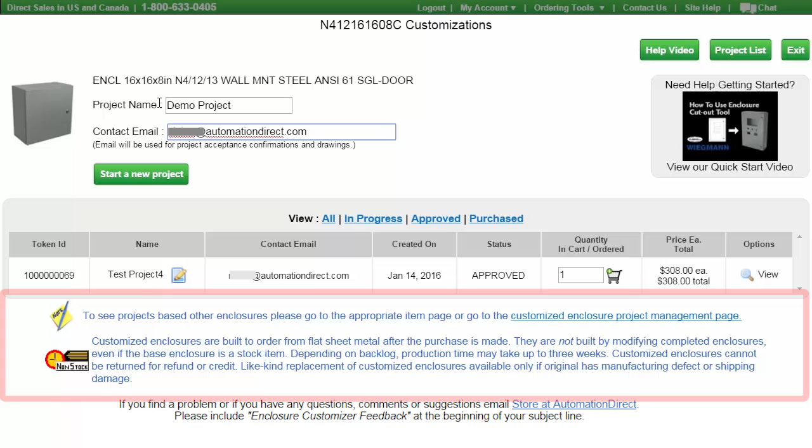Down here there are some important notes. If you click on this one, it takes you to this page where you can see a list of all the enclosures that currently support customization.

This note reminds us that it's important to understand that custom enclosures are made directly from sheet metal. They don't modify already completed enclosures, even if they're in stock. Your cutouts are added as part of the manufacturing flow as the enclosure is made. They aren't added afterwards, which means your holes get the same finish and paint and everything else as the rest of the enclosure, for a truly professional looking enclosure.

That's the good news. The bad news is your custom enclosure will be part of whatever the current manufacturing flow is. So if there's currently a backlog in manufacturing, your enclosure will come out of that queue just like any other enclosure. Just beware that your lead time depends on the current manufacturing load at the factory.

Hit the Start a New Project button, and just like that, we're now in the Enclosure Customization tool. You can save and save as. This green check mark is the one you hit when you're ready to submit your drawing for approval, so don't click that yet. This selects which side of the enclosure you want to view.

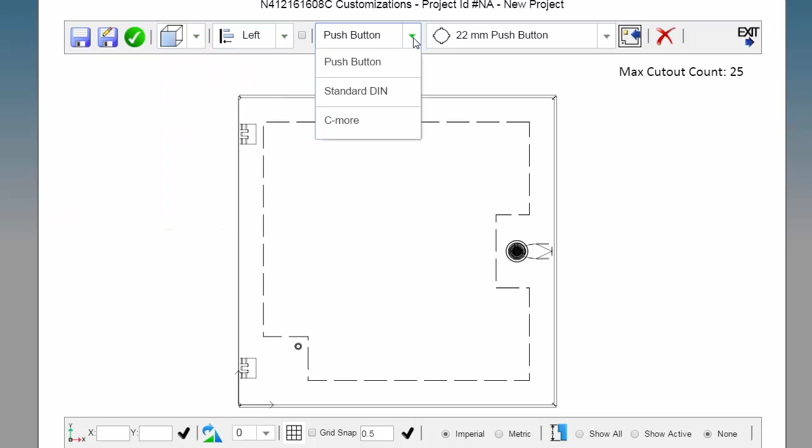This allows you to align cutouts. We don't have any cutouts yet, so we'll come back to that one. This selects the type of cutout: a push button, a rectangular DIN, or an operator interface. And this selects the size of that type of cutout.

For example, let's select a push button and a 22mm hole size. To place that on the enclosure, click the Placement button and click where you want that hole placed. You can then drag that hole wherever you want. The coordinates down here in the lower left corner update as you drag.

Can you type in the coordinates directly? Sure. Let's put this at 5 inches and 5 inches and hit OK. The origin is always in the lower left corner. So this button is 5 inches over and 5 inches up.

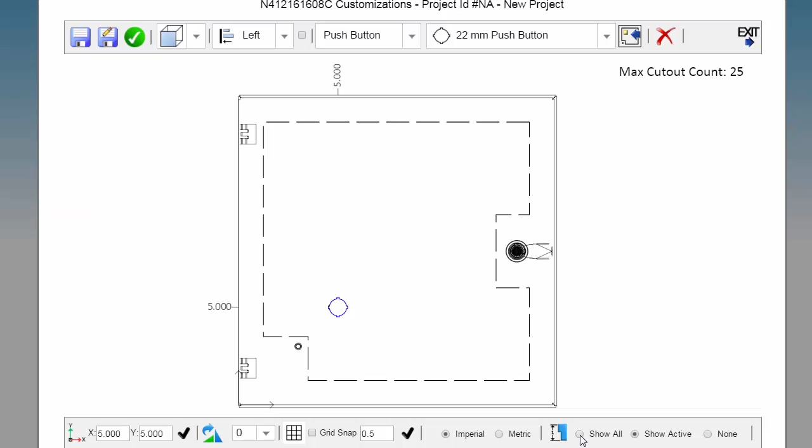You can also see that by turning on the coordinates for this part. Select the part and hit Show Active to see the coordinates for the currently selected part, or hit Show All to see all of the coordinates for all the holes on this face.

This guy lets you flip the part, which makes no sense on a round hole, so let's get something else. How about a 1/8 DIN cutout?

Click the Placement button and then click on the enclosure. I want that centered at 8 by 10 inches and hit the OK check mark to do it. The coordinates of all holes are always at the center of the hole.

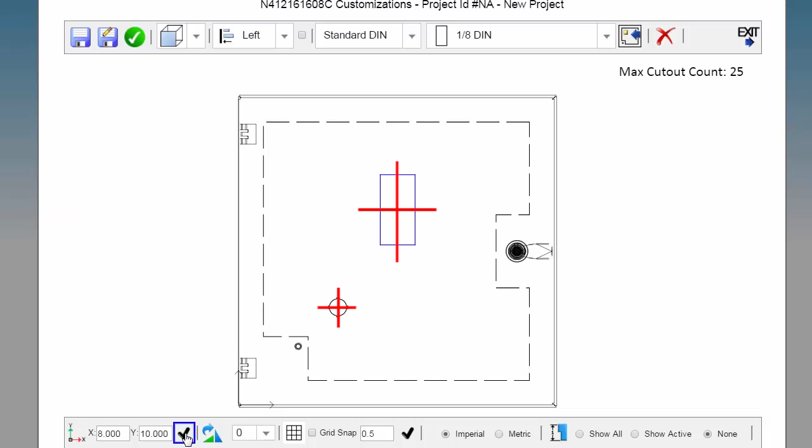We really wanted this to be horizontal, so let's flip it. Just select it, the outline turns blue, and then click on this button. We can also select the angle here. Now I don't actually need that hole, so I'll just select it and hit this red X to delete it.

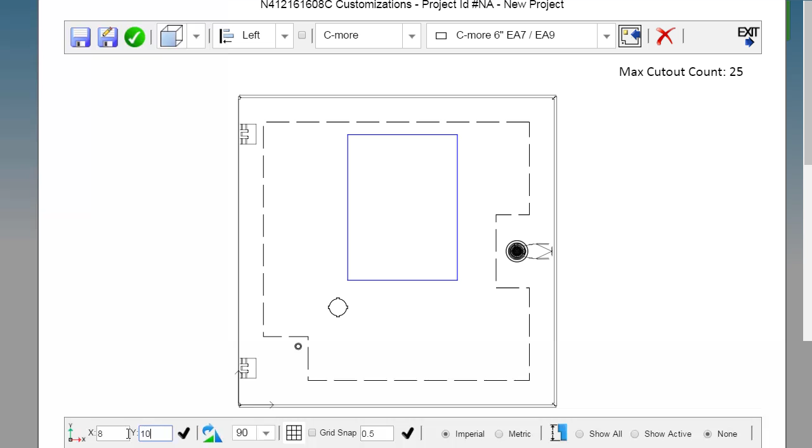Let's add a cutout for a C-more HMI that's a 6-inch panel. Click the Placement button, drop it on the screen, and drag it wherever you want, or enter the coordinates manually. I want it 8 inches over and 10 inches up. And let's flip that to horizontal.

Let's add a couple more buttons. And let's align this one to the left side of the C-more cutout, this one to the right side, and this one to the center.

To align an object, select the alignment type you want. This little checkbox tells us alignment is enabled. Select the base cutout that you want to align everything else to. It turns green to remind you it's the base object.

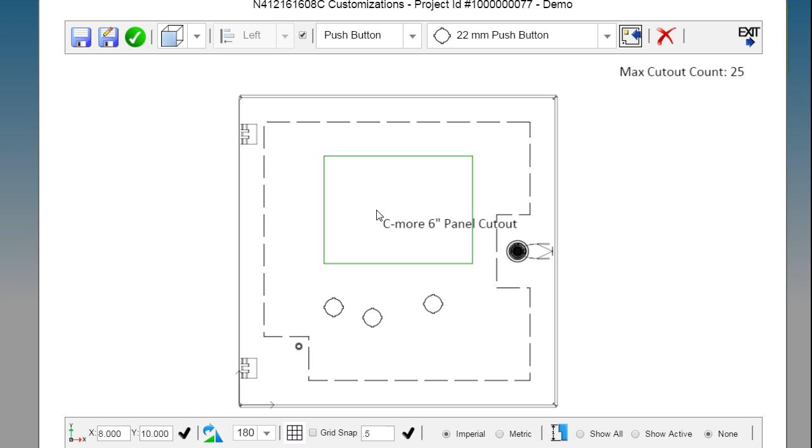Now select the object that you want to align to this green object. Click away to turn off alignment. The checkbox clears, and select Right Alignment. Right Alignment is now enabled. Select the base object.

It turns green. Select the object we want to align to that. Click Away to disable alignment.

Choose Center. Select the C-more cutout as the base object. By the way, if you change your mind and want a different base object, just click Away to disable alignment, re-enable alignment, and select a new base object. Now we didn't want to do that, so I'll click Away, re-enable, and select the C-more cutout as the base object, and then select this cutout to center align it to the C-more cutout.

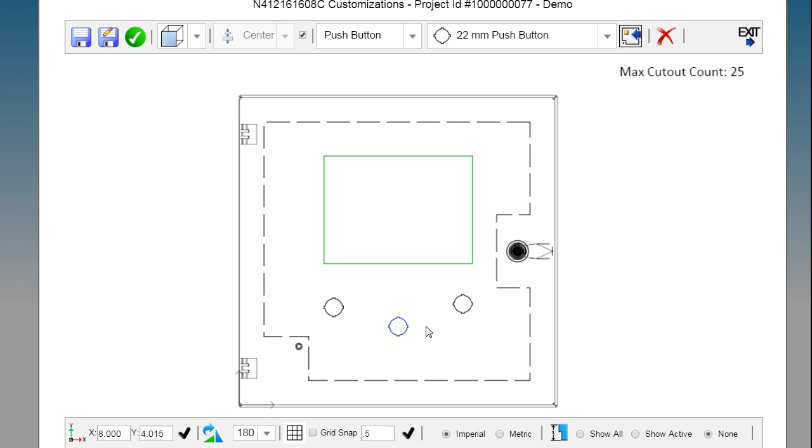You can still drag objects while in this mode. Click on them again to align them as long as the alignment mode is enabled. Now let's align these two buttons with this one. Click Away to finish the center alignment.

Change to middle alignment. Select the first button as the base object, and then select the other two to align them to it. Another way to align objects is to use the grid.

Let's click Away to finish the alignment tool and turn on the grid. Enter the grid size you want here and click the OK check mark. The grid always starts at the origin. Any cutouts you add now will always align with the nearest grid intersection.

Can we use the alignment tool while in grid mode? Sure, and note that the alignment still uses the green object as the alignment guide, not the grid.

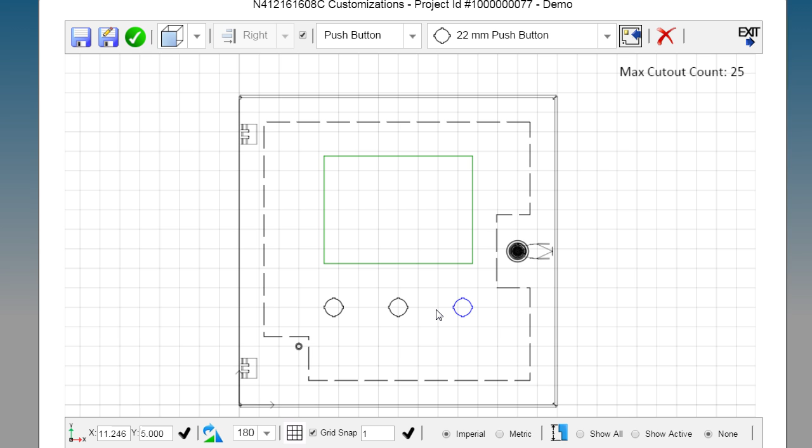Again, this button shows you the cutout coordinates for all the holes on this face relative to the lower left origin, and this shows everything in metric. And of course, you can do everything we've shown here to any side of the enclosure up to the maximum of 25 cutouts. Suppose you aren't done, but you need to go do something else for a while.

Well, just hit Save. It saves the design. So if we exit, we already saved the changes, we can come back anytime by clicking on this Edit button, and we're right back where we were.

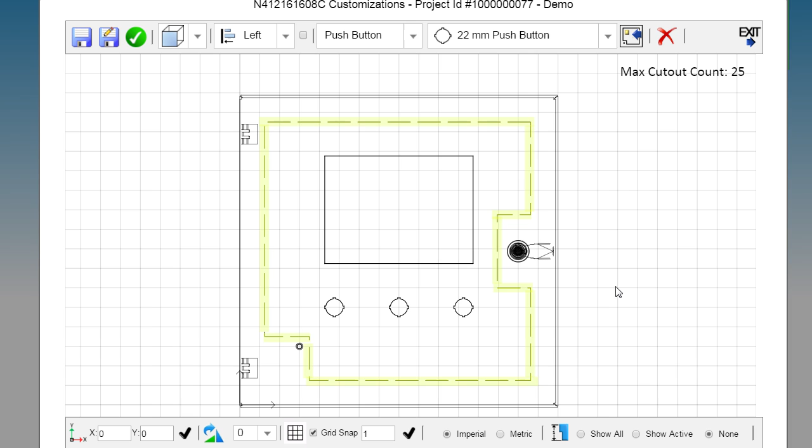This dashed line is the maximum allowable cutout area. You won't be allowed to go past that dashed line. This tool also has minimum clearance for cutouts. If you try to put a cutout too close to another, you'll see a red interference line pop up.

Now please understand that these red interference lines are just allowing for cabinet integrity. They leave enough metal so no portion of the cabinet will be too weak. They don't show interferences for the parts you plan to use.

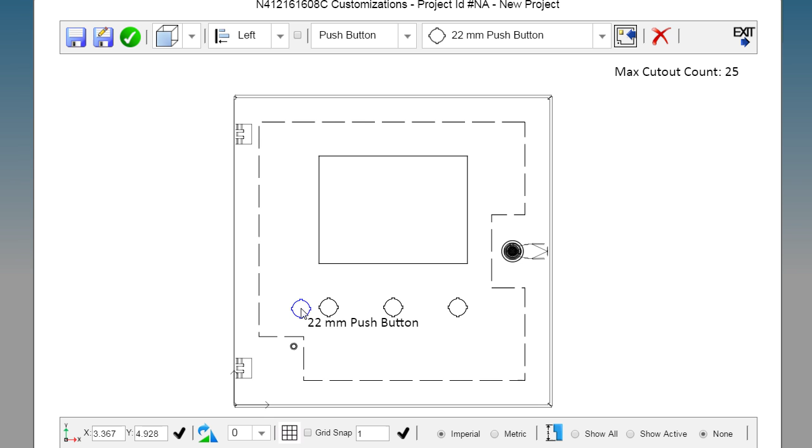For example, suppose you add a big red 60mm button here for an e-stop. The hole fits just fine from a cabinet integrity check, but when you go to mount the button, it might crash into the button next to it. Or maybe you put a button here and forget to take into account the width of the C-more HMI's bezel.

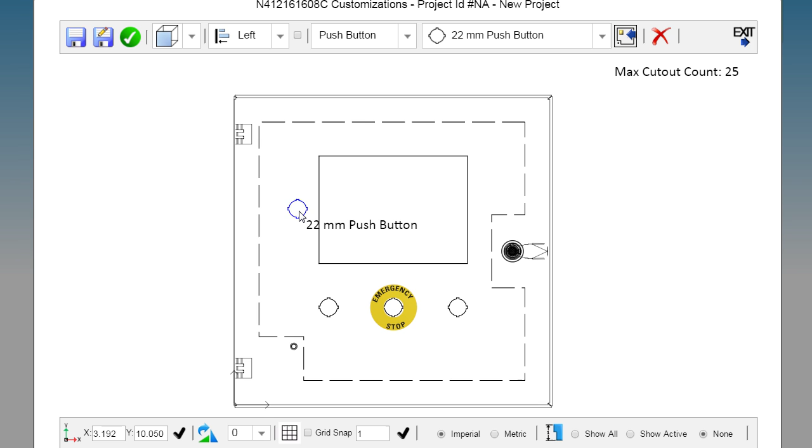Or maybe you're planning on using a fancy nameplate of some kind. Or maybe you put something here and then on this side put something here. Will they interfere inside the cabinet?

This custom cutout tool has no way of knowing what you plan to put there, so you need to be extra careful to double and triple check for interferences on the parts you plan to use before you submit this design. Automation Direct won't be able to honor the return policy if you simply forgot to take something into account.

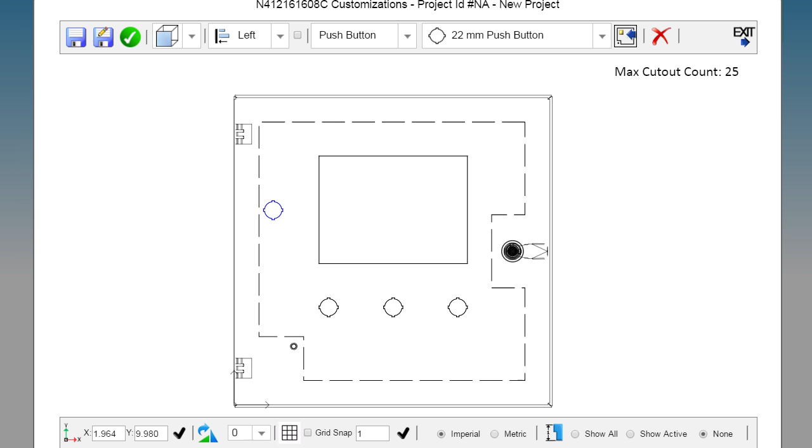Well, once you're happy with the design, click the green check mark. Verify that this is the email you want approval notifications to go to, and hit OK. This is fully automated, so you should get a reply within a couple minutes that looks like this.

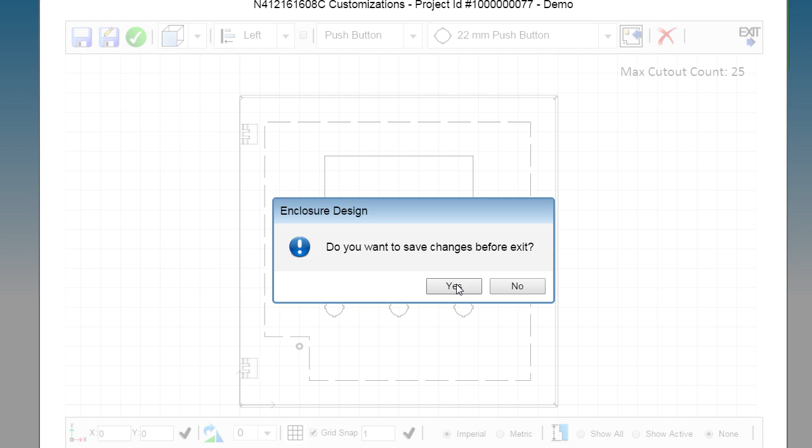Once you're happy with everything, click here to approve the design. Once you do that, if you exit the cutout tool and look at the project list, you see that you can now purchase that box with the cutouts.

Just enter the quantity, add to cart, and proceed with your purchase like you would any other part. Now don't add a number here. This is for ordering blank boxes. Your enclosure with holes in it is already in the shopping cart. Click on the plus sign and you can see the details of your order.

We mentioned at the beginning of this video that you just click on the Customize button to start the process. If you just want to go to the tool directly, then go to the Ordering Tools menu and select the Customize Enclosures tool. Now this tool only shows up in this menu if you're logged into the store.

On this page, you can see all of the enclosures that currently support customized holes, and you can even watch this video. If you have any questions, please contact Automation Direct's free, award-winning support team during regular business hours.